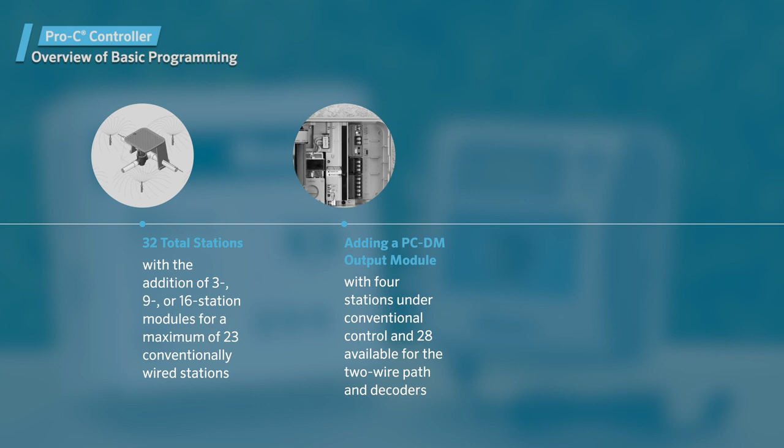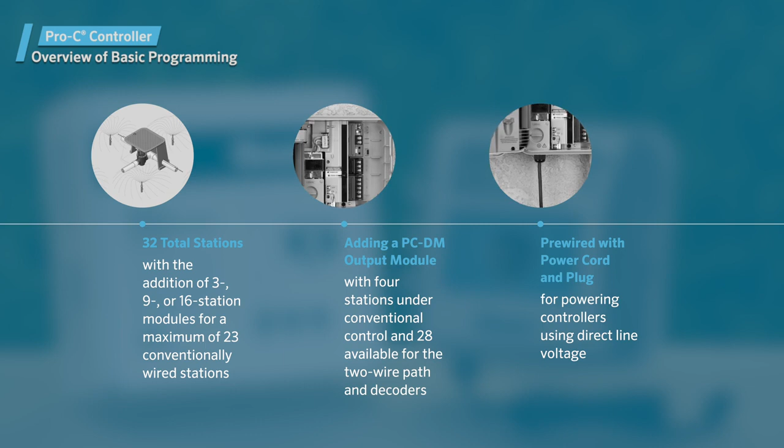The unit can control up to 32 stations when adding a PC-DM output module to the EZ Decoder System with 4 stations under conventional control and 28 available for the 2-wire path and decoders. PRO-C controller models are pre-wired with a power cord and plug for simple installation in both indoor and outdoor applications. They can also be powered using direct line voltage, which should be installed by a licensed electrician.

We'll show you how to set the date and time, assign a start time to a program, set run times for each station in the program, and designate the days to water. Keep watching to learn the basic programming steps required to create an irrigation schedule. We'll also cover pump master valve operation, as well as the seasonal adjustment, manual operation, and system off functions.

We'll use the arrows to navigate through the various settings, as well as the plus and minus buttons to change the current value while it's flashing. The Program button allows us to go from Program A to B to C. The first step in programming any controller is setting the current day and time. To do this, turn the dial to the date-time position.

The year will flash, signaling that it's ready to be updated using the plus or minus buttons adjacent to the display. Use the right arrow to advance the year, month, and day, pressing the plus or minus buttons for each to select the desired option. To select the time, press the right arrow until you see AM flashing on the display. Press the plus or minus buttons to change it from AM, PM, or 24-hour mode.

Press the right arrow to advance to the hour and change it using the plus or minus buttons. Advance to the minutes and adjust them as well using the plus or minus buttons. The date and time have now been set. Now that the current time is programmed, we'll set programs next. But before that, let's review some terminology.

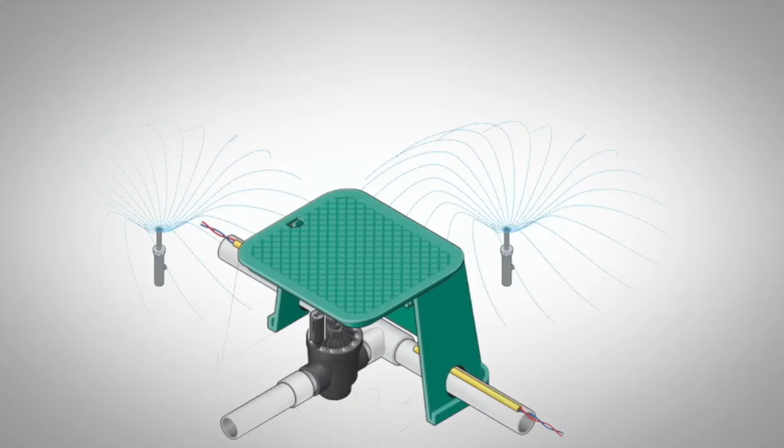A station is a group of sprinklers controlled by a single valve. A station is also known as a zone. A program is a group of stations sharing a sequential watering schedule. A schedule is an established plan that tells the controller which days of the week to run a program, as well as the number of times the program will cycle on each watering day.

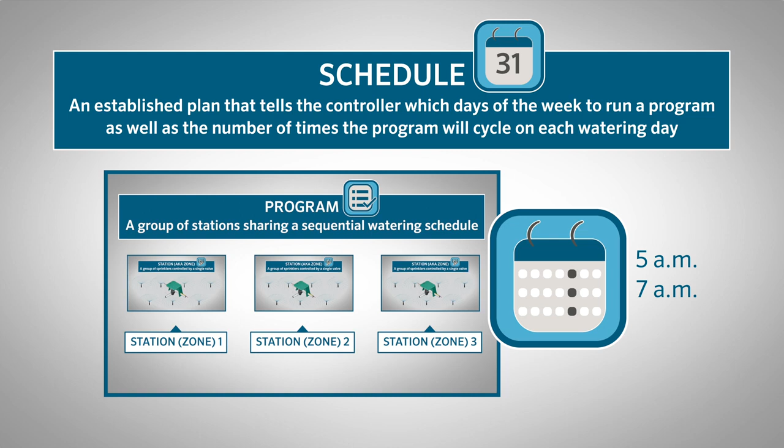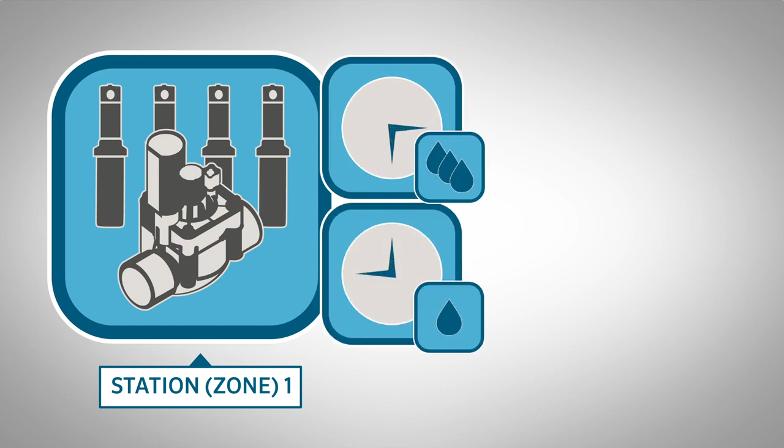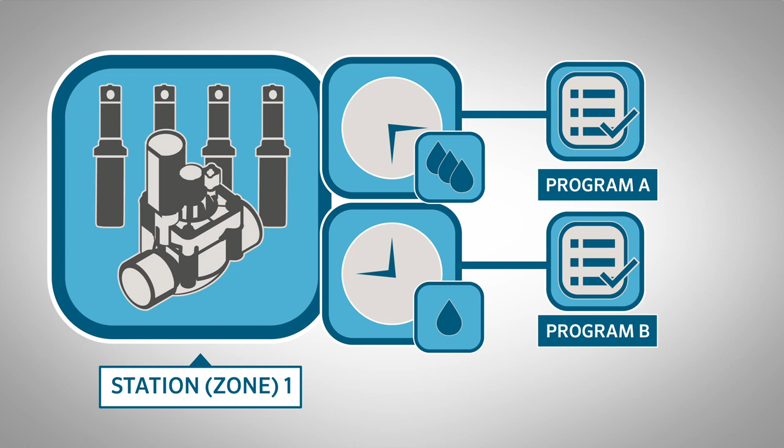If all stations will irrigate on the same days and the same number of times per day, then you could program them in the same program. However, if some zones need to be watered more or less often than others, then you'll need to separate them into multiple programs with different day schedules. For even greater irrigation control, you can set various station run times in the separate programs to allow for flexible watering durations. Let's say Station 1 needs 10 minutes of watering in the morning, but only requires 5 minutes in the evening. You can set the 2 run times using different programs.

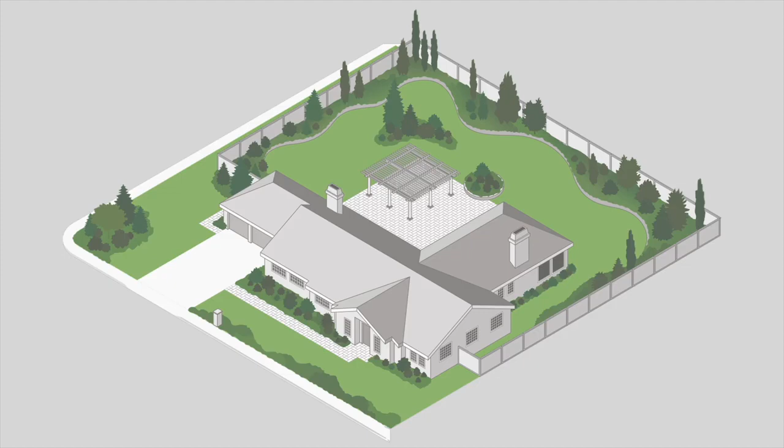Each program can have a different number of start times, which is the time of day your program will initiate the watering cycle, which will cause the program to run more than once. You can schedule a program to cycle up to 4 times per watering day. Just know that each start time causes all the stations within a program to run a complete cycle in sequential order. To give you a deeper understanding of the programs, consider this real-life example.

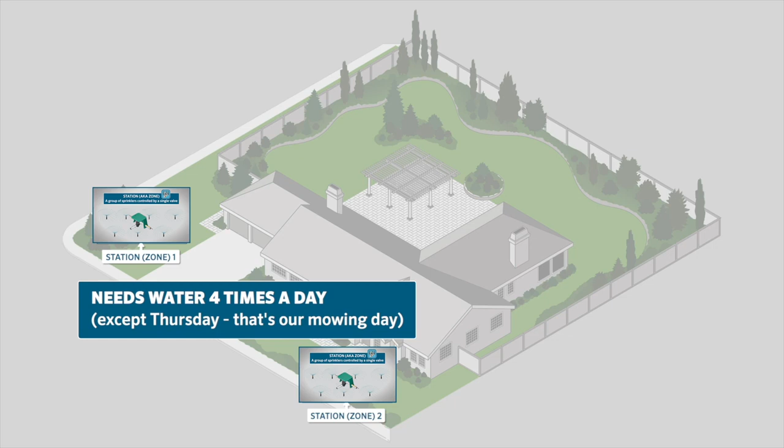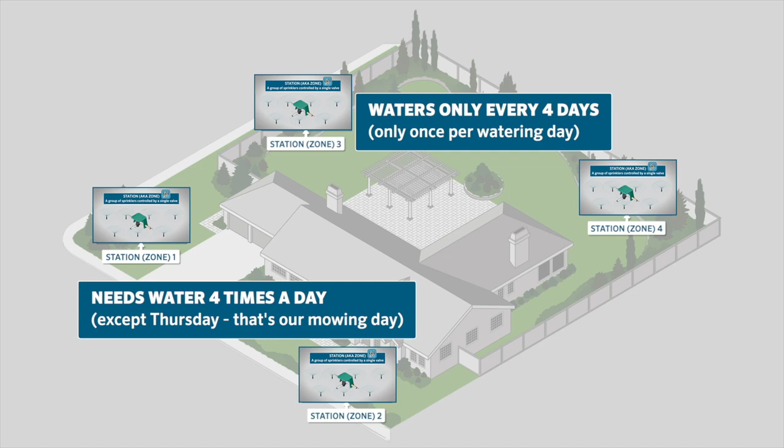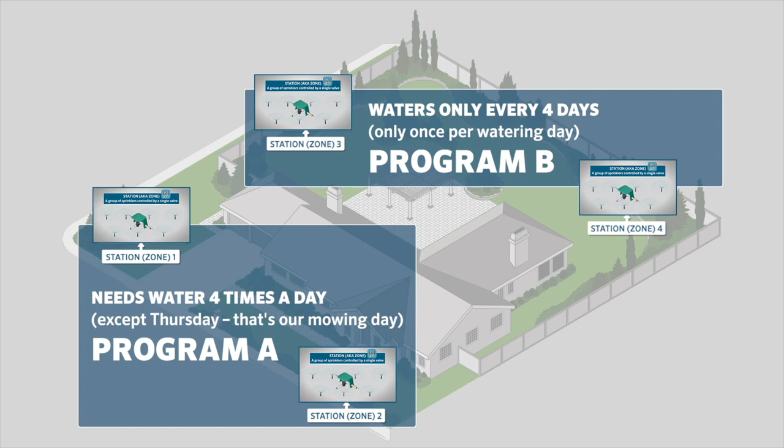Let's say you have 2 newly seeded zones, stations 1 and 2. Since the grass is new, you may need to water both zones on a daily basis, 4 times a day, with the exception of Thursday because that's your mowing day. Let's also say you have 2 other zones, stations 3 and 4, that need to be watered only 1 time per day every 4 days. Therefore, we'll need to divide these 4 stations into 2 different programs, A and B. Program A will include stations 1 and 2 with the new grass, and Program B will include stations 3 and 4 with the trees. Setting start times.

To create a program, you must provide the following 3 items: at least 1 start time, station run times, and days to water. We'll start with the start times. Turn the dial to set program start times. The display will show the first start time in Program A. The first start time represents the first complete cycle of all the stations that have a runtime in Program A.

We'll use the plus or minus buttons to program the time we want our system to cycle for the first time, in this case, 6 a.m. Since we want to water multiple times a day, we need to advance to the next start time so that the program cycles a second time at 10 a.m. Next, advance to the third start time and program it for 2 p.m. Finally, set a fourth start time for 6 p.m.

Pro-C controllers allow you to program a maximum of 4 start times per program, with 3 programs available, A, B, and C. If you need to cancel some of the start times later, simply press the plus or minus buttons numerous times until you find the word off. You'll find this between 11:45 p.m. and 12 a.m.

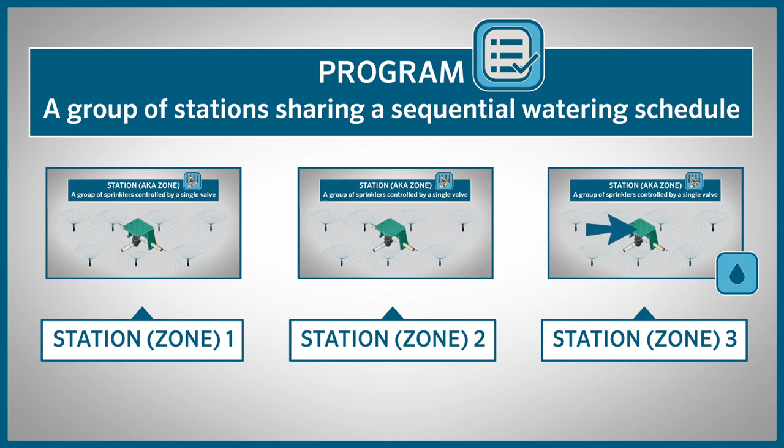All stations operate in numerical order. Only one program start time is required to activate a watering program. If a program has all 4 start times turned off, then that program will remain off, though all other program details are retained. Because there are no start times, no watering will occur for that program.

Next, we'll assign a run time to each of the stations within Program A. Turn the dial to Run Times. This is where we'll designate the length of time that each station will run within the program. The display will show the last program selected, A, B, or C, and the station number selected. The runtime for that station will flash. You can switch to another program by pressing the PRG button.

Let's program 10 minutes on each of the 2 stations with new grass. Do this by pressing the plus or minus buttons. Advance to Station 2 using the right arrow and program 10 minutes there as well. We'll leave the rest of the stations set to 0, because Stations 3 and 4 will be assigned to Program B since they require a different schedule.

You'll notice that at the end of the station count, the controller will give you the total runtime for all stations scheduled to run in the program. This function is known as the Total Runtime Calculator.

The last step to create Program A is setting the days to water. Turn the dial to Water Days, and let's program it to water every day except for Thursday, which is mowing day. To activate a day, press the plus button. To cancel a day, press the minus button. We'll press the plus for Monday, Tuesday, and Wednesday. For Thursday, we'll press the minus, and for the rest of the week, we'll press the plus button. This completes Program A.

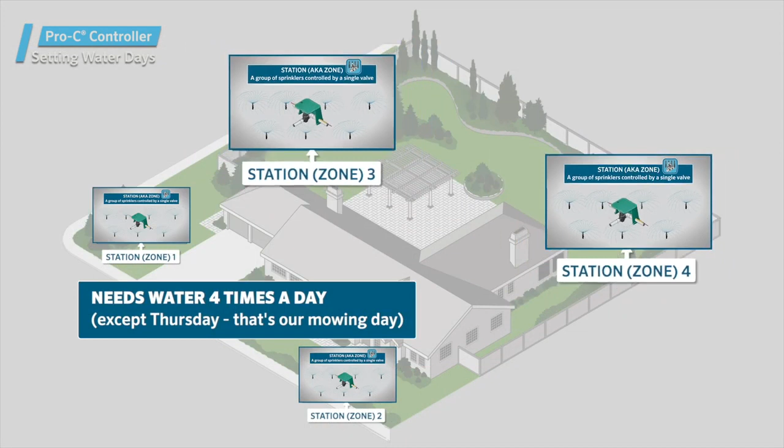For the days to water, we decided that Stations 3 and 4, which are in Program B only, need to irrigate every 4 days. Turn the dial to Water Days. We'll use the Interval mode to program this schedule. To access the interval mode, press the left arrow button while the dash mark is flashing next to Monday. The interval number will flash. Use the plus or minus buttons to program the watering frequency. Since we want to water every 4 days, we'll program an interval of 4, which means that the system will skip 3 days between water days, therefore watering on the 4th day.

When you program an interval schedule, you'll be asked to select the number of days you want to elapse before it starts to water. 0 days left means the system will water on the very next watering start time. Thus, if we have a start time set for tonight after we're done programming it, then it will water tonight. Otherwise, it will simply water tomorrow. If we program 1 day left, the controller will skip 1 day and water on the following day.

At the bottom of the display, you'll see the days of the week. This gives you the opportunity to cancel any day of the week if you decide you don't want to water on a particular day. You can also cancel odd or even days while still being in the interval schedule. Continuing with our example, if we usually do yard work on Thursdays, and we don't want to be surprised by the sprinklers, we'll choose to water every 4 days but never on Thursdays. To do this, we'll move down to the day we want to cancel and press the minus button. This places a crossed-out raindrop on top of Thursday and prevents watering on that day.

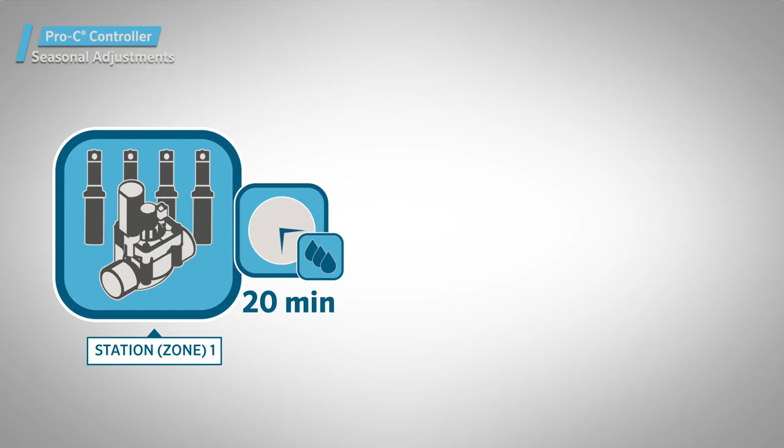The seasonal adjust dial position allows you to decrease or increase the seasonal adjustment percentage, which results in shorter or longer run times. Simply put, this is a multiplier for the base station run times. For example, if you reduce the seasonal adjustment to 50%, stations that were originally programmed to run for 20 minutes will now run for only 10 minutes.

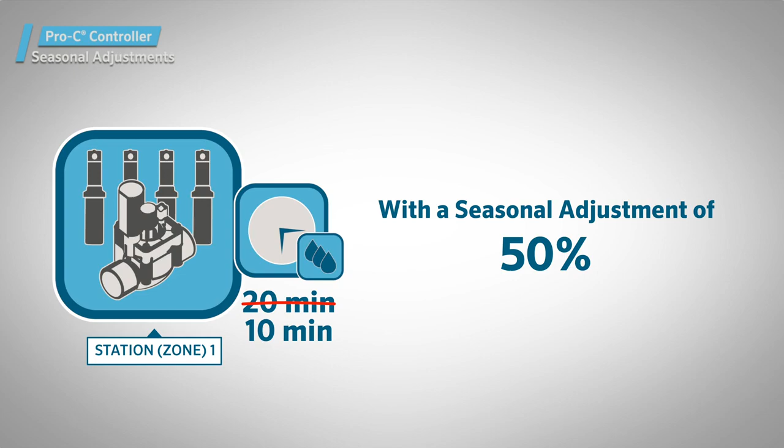You can use the seasonal adjust value to quickly apply shorter or longer run times to all stations without having to reprogram the run times one by one. This is a big time saver. When you program base station run times, it's important to keep this value at the factory default of 100%, or the seasonal adjust won't function properly.

We're going to skip the Solar Sync function for now. Instead, we'll move on to the manual dial position. From here, you can activate a single station for a manual run. Simply choose the station you want to start, ensure that it has the desired runtime set, and turn the dial to run. The station will start watering, and you'll notice a sprinkler flashing on the display while the runtime counts down. You can skip forward or backward to manually run the other individual stations before the manual cycle elapses.

While a manual single station is running, press the left or right arrow buttons to select a new station, and press the plus or minus buttons to increase or decrease the runtime. This will stop the previously running station and activate the newly selected station.

If you want to manually activate an existing program, this can be done with the simple push of one button. This feature is great for a quick cycle when extra watering is needed, or if you'd like to scroll through the stations to inspect your system. With the dial in the run position, hold down the right arrow button for 2 seconds. After a 2-second pause, the program will begin.

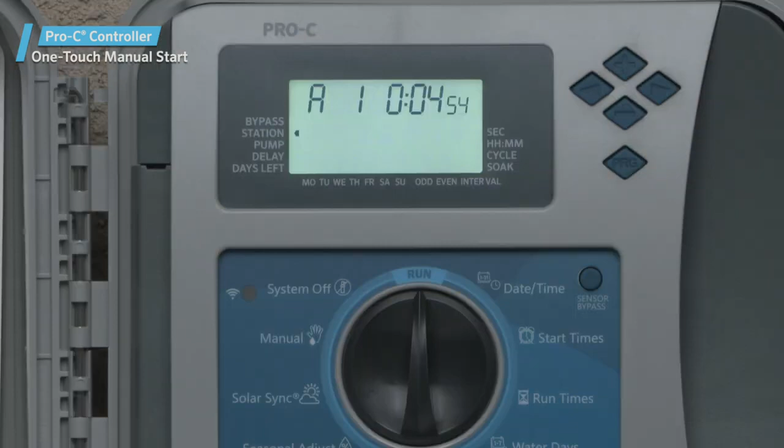This feature automatically defaults to Program A. You can select Program B or C by pressing the PRG program button. Press the left or right arrow buttons to scroll through the stations. You'll use the plus and minus buttons to adjust the station runtimes. The default runtime settings will match what is currently set for each program.

The system off dial position is used to deactivate any station or program that is currently running. When the dial is set to system off, it also inhibits all automatic irrigation indefinitely. To return the controller to normal automatic operation, turn the dial back to the run position.

Programmable days off. There is an option to disable all automatic irrigation for a designated period of time without leaving the dial in the system off position. This is called programmable days off. This feature permits the user to stop all programmed irrigation for a designated period from 1 to 99 days. At the end of the programmable off period, the controller will resume normal automatic operation.

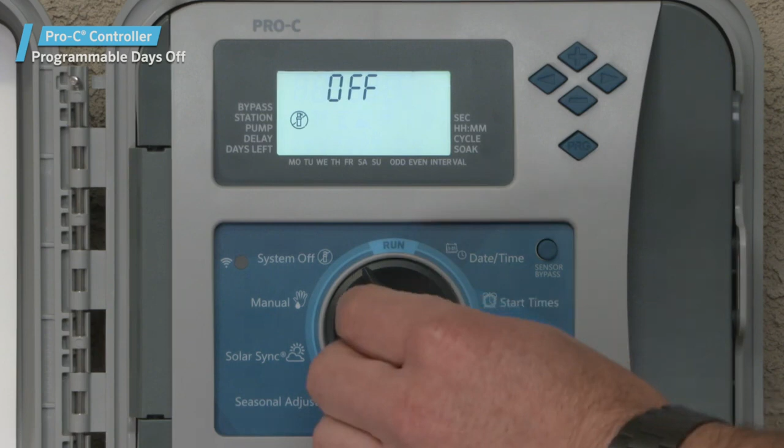Turn the dial to the system off position. Press the plus button, and a 1 will display next to off. Press the plus button as many times as needed to set the desired number of days off, up to 99 days. Turn the dial back to the run position. The controller is now set to off for the set number of days.

The days off remaining will decrease at midnight each day. When the countdown reaches 0, the display will show the normal time of day, and the previously set irrigation program will resume at the next scheduled start time.

In this video, we've covered the steps for setting up a basic program. However, the PRO-C controller offers other advanced features that will be discussed in a separate video. For detailed programming information, consult the owner's manual at hunterindustries.com.